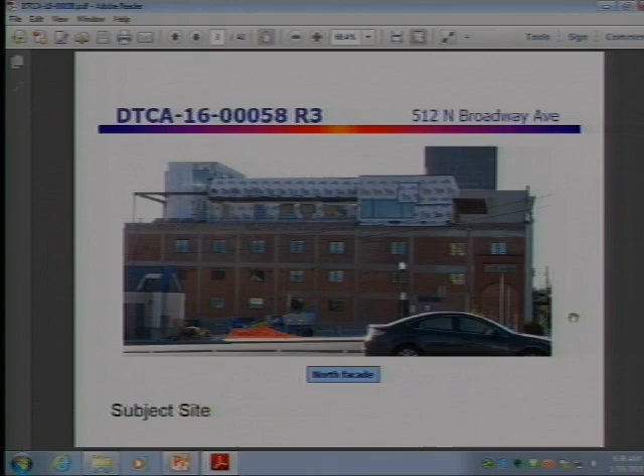Thank you. As I said, Sam Gresham, architect, here to represent the owner. I'm going to apologize. We don't design this until after it's done. This process has been a bit fluid. I don't want to take responsibility for this, I just want to fix it.

So we've proposed some ideas to staff to remedy this, to cover it up essentially, and change elements of the exterior to comply with what they find objectionable about the improvements or changes made to the third floor. It's really just this far west end, and it really involves the penthouse.

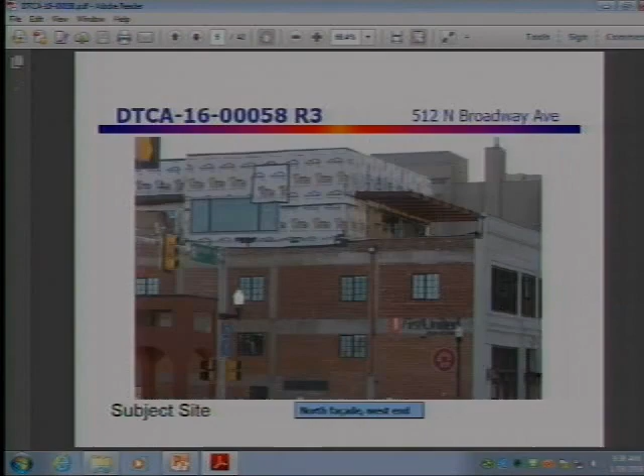Our proposal is, as I said, we've made a suggestion after staff's report on recommended item 1 of our staff report that recommends denial. We ask, though, that on item 2, where you can approve some of these items, those be approved so that we can simplify what we're asking for, and request a continuance on item 1 of the staff recommendation.

Okay, and is the intention to submit additional documentation to staff? Yes, new drawings to provide alternatives. Okay. Is that an option, to continue part of an item?

Okay, yes, staff would support continuing items 1P1, 1P2, and 1Q1. Basically, instead of denying those items, we continue them. And I guess because they're already into design, and we need it by next week, we could continue to February, because I think he's prepared to go ahead and submit possible solutions.

So that additional documentation would need to be submitted in roughly a week or so. Is that acceptable? We have it, yes.

Do we have any comments or questions from the committee? Do we have anyone else who would like to speak to this project?

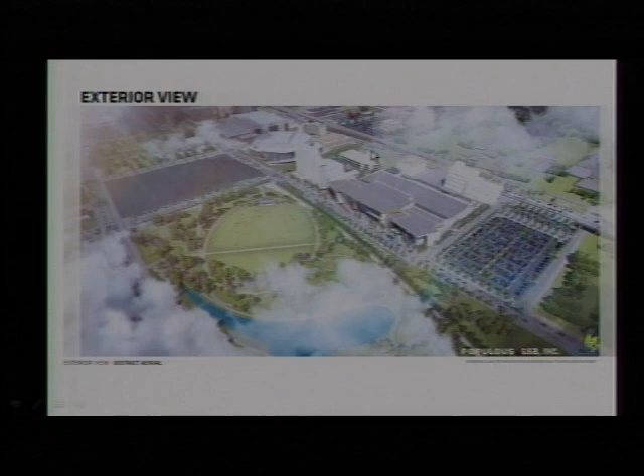Just a real quick summary - this is the convention center, park, hotel, aerial district. Again, these are placeholder locations, but you can see to the north of our building the hotel, or a version of it, and a parking structure. Those are the two items we're looking to make connections to.

Just a quick update - the building itself has not changed. The program areas are still there: the 200,000 square foot exhibit hall, the 45,000 square feet of meeting spaces, and the 30,000 square foot ballroom. All that's as is. As we showed last time, we're really just talking about an extension of level 2 along the north face of the building, and bridges that reach across 4th Street.

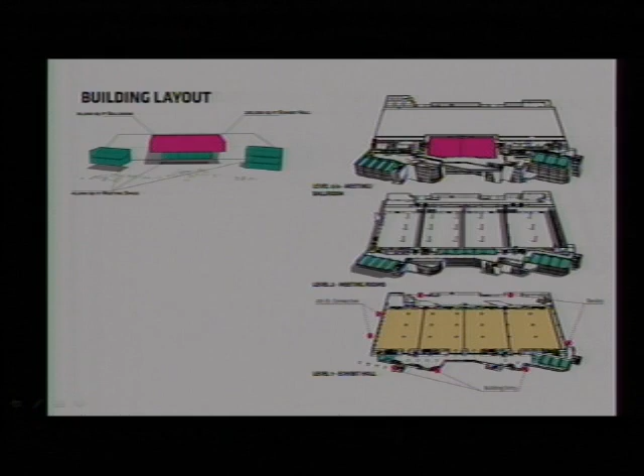Looking at these SketchUp aerials, you're seeing the convention center in the top right of each image, and the north face of the building. This pedestrian walkway would be provided at level 2, and there would be a garage connection or bridge from our building reaching over to the parking garage. That's going to be built and is being documented as part of our base scope.

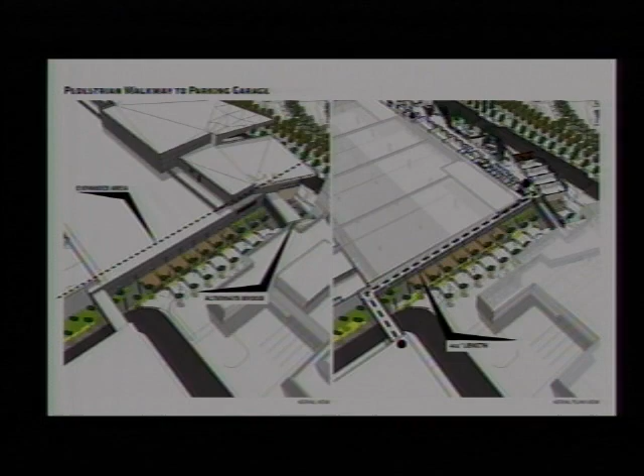The second bridge, from our level 2 across to the hotel, we're currently documenting as an add alternate, so we'll get a price on it and see if it fits our budget moving forward. Plus, knowing the hotel is behind us in scope, there's still additional design work required to make the connection as seamless as possible. But at this point, we've drawn what we know, coordinated with the hotel team some, and have something in our documentation that can get priced.

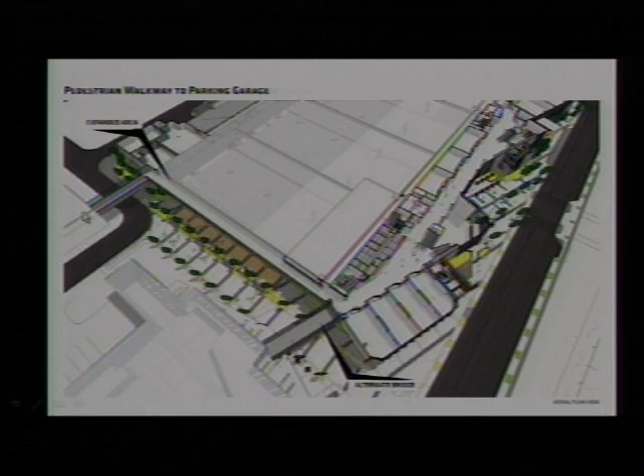Just another view - the west side of the building, or Robinson Street side, is at the bottom. You start to see this walkway and bridge access across there. What we did is extend out the current facade we had, a plaster stucco facade. We pulled that out, which created a covered walkway below along 4th Street.

We talked about that last time, as this would be kind of a pedestrian plaza area that would allow exhibit space to spill out on certain events. This provides a nice covered walkway for exterior use, whether for shade or protection on a rainy day or something.

If you're walking from the garage trying to get to the building, you could get some covered areas there. Ultimately this provides another option for customers and users of the building, those that park in the garage, a way to get into the building in enclosed and conditioned space rather than walking outside in inclement weather. But we still want to encourage people to use the streets and sidewalks at times too - it's just providing a second option.

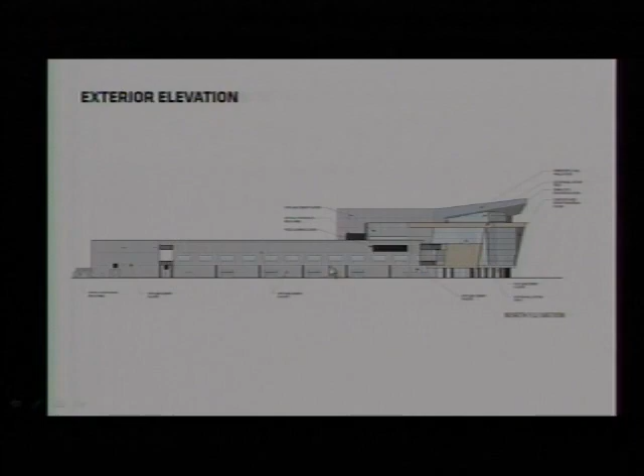This is a newer facade. The previous views were earlier in the concepts. We've added some larger windows along this to get more light into that long walkway, so the windows are bigger on this elevation than in some of those SketchUp views. Before, they were more single punched openings, and we tried to get more light and views out.

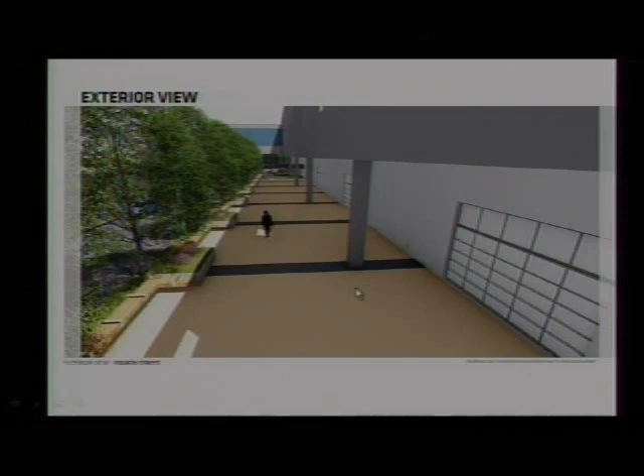We've updated the landscape under here to allow more free movement. There used to be some planters and boxes and lights around here that we had to remove when the columns came in to support the structure, to allow movement under there more freely for the covered access of this space. And just another quick view of that north facade.

And then last, here's the overall landscape design of that area. Again, nothing really a lot different. The same notions and designs are still there that we had initially shown. It's just how it had to change a little bit when this walkway was introduced.

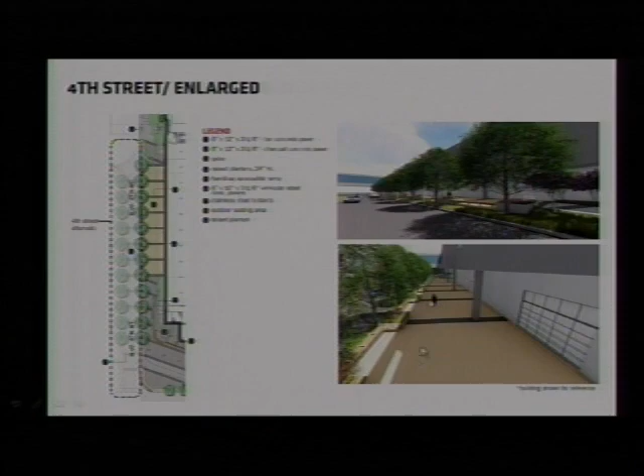Could you speak to the cladding materials for each bridge? The bridges, yes, let's go back a little bit. The pedestrian bridge to the garage, which would be this bridge up here, is an extension of the same material that is on the north facade, so it's basically curtain wall with plaster stucco on each side. And then if you go to the hotel bridge, it gets a little bit more treatment.

You can see it here. Is there another view? That bridge gets a wrap of some of the terracotta and the wood veneer that we had used on the soffits and other features where we had more enhanced materials on the western facade of the building. So that bridge carries some of that same material in and gets a little bit nicer finish than the garage bridge.

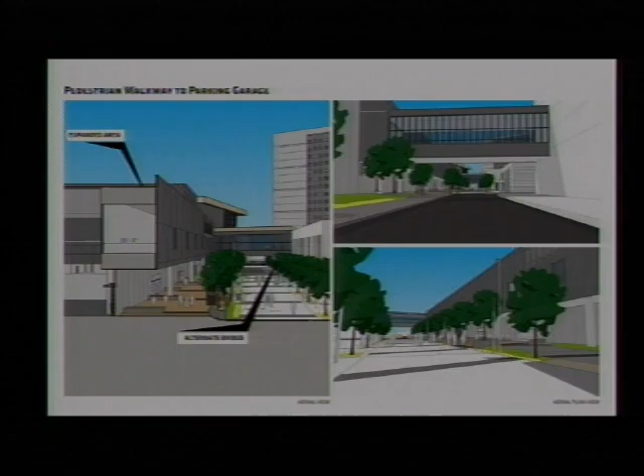And also, could you speak to the sidewalk changes that are part of this application as well? Yes, so really what that was referring to was the changes required around here for the bridge, but we did add some change to the sidewalks along 6th Street to get some additional bus queuing. This isn't a bus drop-off space for pedestrians, but it's for buses to get off of 6th Street. Prior to that, they were just parking along the curb of 6th Street. We wanted to maintain 6th Street's flow a little better, so we decided to do that, and it had to just revise the paving and some of the landscaping back there.

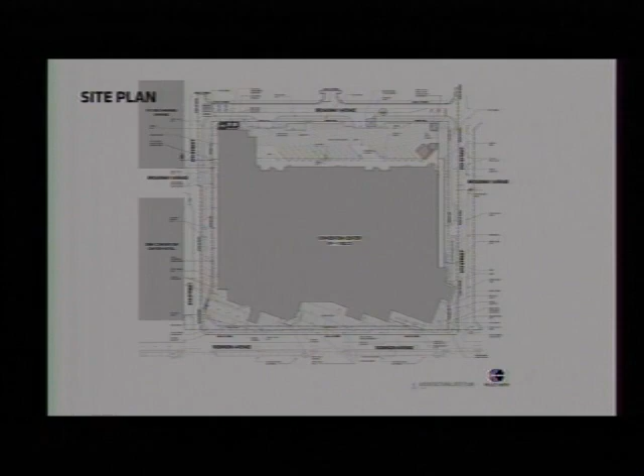Do we have any other questions or comments from the committee for the applicant? Do we have anyone here, anyone else that would like to speak to this?

Well, personally, I think the extension of the bridge on the north side of the building does enhance the sidewalk, specifically to the purpose of having exhibit space on that sidewalk spill out of the building. Providing some cover past the building facade is beneficial to that. And then almost clearing the sidewalk in front of those overhead doors allows for more flexibility in what those exhibits could potentially be.

Yes, I agree. If there's no other comments or questions, we'd be looking for a motion.

I'll make a motion to approve the item as recommended by the staff report. Second, that was Black Kriegel. All those in favor? Aye. Any opposed? Thank you, application is approved.

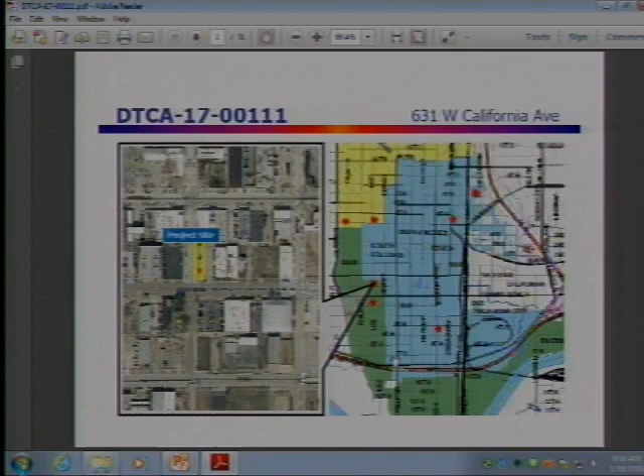And this one is proposed to go in the right-of-way. Did I get this right? Yes. Oops, sorry. It's proposed to go in the right-of-way on South Lee, just north of Southwest 2nd Street. Currently adjacent to it is a parking lot for Ozarka Water, and you can see the path here is where I-40 used to be, and it's the path of where the boulevard is going to go in, the section they haven't started working on yet.

So it's proposed to go between the sidewalk and the fence. I put a red X approximately where it's going to go. In the staff report, I indicate the sidewalk actually got replaced subsequent to the application being received. The applicant had no idea that it got replaced, and so the topography has changed, and it's pretty steep. The sidewalk might actually even be a little wider.

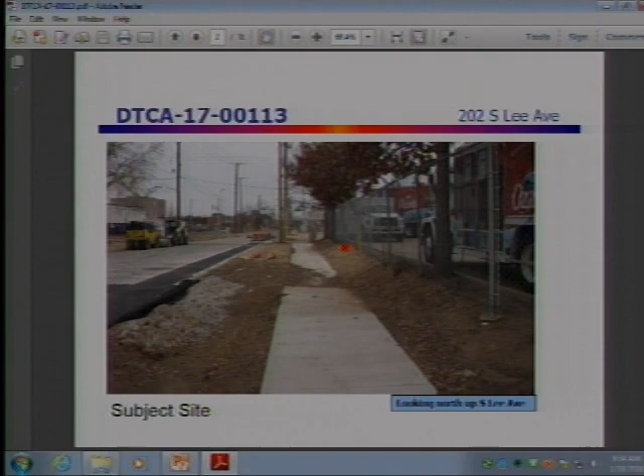But staff is concerned about this location from the standpoint that at some point in the future, if we anticipate that this site is developed, buildings coming out all the way to the street could be impacted if there's a 35-foot tall pole either on the property line or within a foot of it. It could impact the design, the location of doors and windows, that type of thing.

We contacted the Public Works Department because we're also concerned about the location of where the boulevard's going to go in this area. There's a significant amount of work planned here. Apparently Second Street's going to be closed. The entrance to the parking lot is currently on Second Street, and they're looking to relocate that access to Lee, which potentially could be right where the pole's proposed.

So in the staff report, we recommend several things. One, we feel the best location for something like this would be in the back of a property, on the alley, next to a building, on top of a building, and not in the amenity zone where you want to see things that are amenities to pedestrians, such as benches, trash cans, or landscaping. This area is going to change, especially when the boulevard goes in. So staff recommends that this item be continued to allow them to look for moving this location and not having it out in the right-of-way.

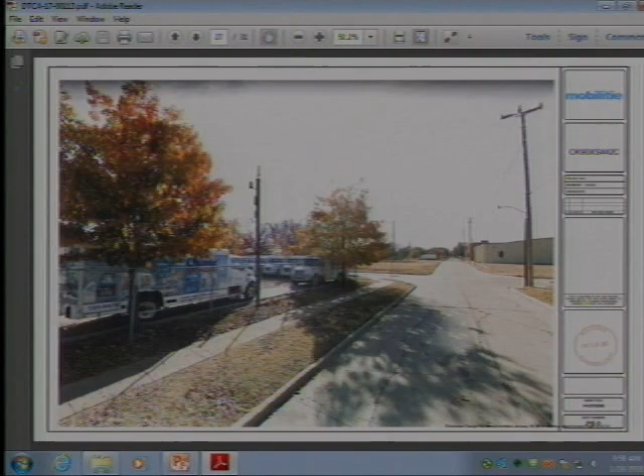Just one thing, sorry I didn't have this up earlier. In the staff report, the proposed pole is 35 feet from the ground up to the top of the antenna. If you look at that, the fence is 6 feet tall. So one of the things staff also included in our recommendation is that proportionally that pole doesn't appear to be photoshopped in at 35 feet—it's going to be taller than that if the fence is actually 6 feet tall. So we were recommending that, in addition to all the other items I mentioned, this get revised so it's more accurate with what it's going to look like, whatever location they choose.

I measured the fence yesterday—it's in the packet. It's 6 foot 8.5 inches tall, and the pole itself does need to add another 15 feet proportionally, but it won't be any taller than the utility pole across the street.

Is there anything that precludes the pole's location from being moved north or south along the property? In the packet there's some information about how this technology works—it's different from the regular cell towers we see, those blade-looking devices.

If you turn in the packet to the information on increased usage, you'll find a page that looks like this, a breakdown of the equipment. This cell pole equipment is very advanced in a way that it cannot perform if it gains interference from being next to a regular traditional cell pole. It has to be away from overhead power lines, has to have an umbrella of area, has to have open sky above it. The antenna itself is 3 feet tall, 4.5 inches round, and again, interference from other power lines and other traditional cell tower antennas interferes with this signal.

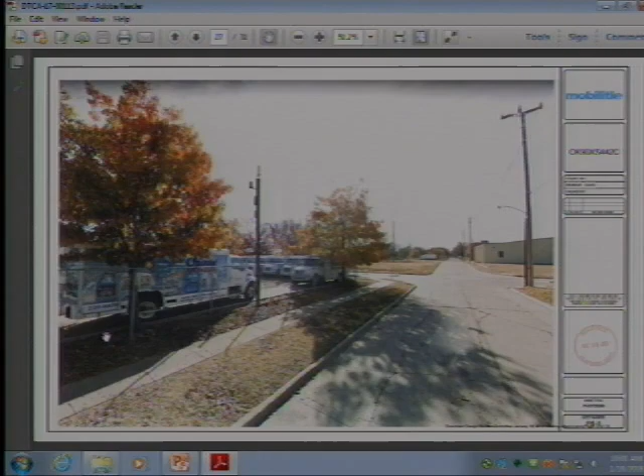So I see there's existing lines on the west side of the road. My question still holds: is there anything precluding moving this pole north or south along that side of the property? On the west side? I'm sorry, the west side. Based on this photo, there are electrical lines on the west side of the street. Right. So my question still holds, is there anything precluding shifting this pole north or south of its current location along that property? There wouldn't be anything, but on the north end of the property there are power lines that start up and go down the alley, so it would have to jump over that alley and into the next lot.

But the other reason we accepted this site is that the property owner is in agreement. On the last page, you'll see they have an agreement with no objection to us installing here. We're not obligated to seek the property owner's permission, but we always try to communicate with them, and he was agreeable to the installation on the adjacent property. I found a picture describing what he was saying: when you go north of this location on the east side, when you get to the alley, that's where the poles start up. They actually have poles on the east side of Lee Avenue, north of here. Okay, that helps.

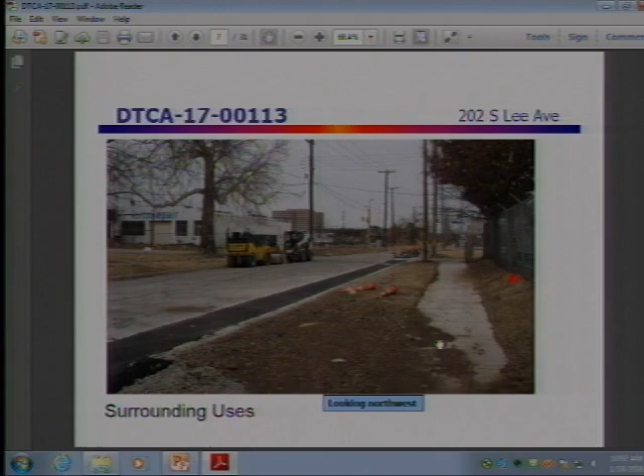Do we have any other comments or questions from the committee for the applicant? Yeah, why can't you go on top of a building? Again, on top of buildings or private properties, the internet providers do not want to be on private properties, because the uniformity of working with the cities and the ability to work in the right-of-way as part of the utility licensing through the state of Oklahoma allows us to do that. But you also cannot control if a private property owner wants to put an antenna on top of their building, which would take down the availability for our antenna to work properly. So putting the pole in the right-of-way is the best solution to make sure we have open air and are able to pick the spot that is best for the signal.

None of these poles are by speculation. It's not a situation of 'if you build it, they will come.' The need is already there, so that's why these areas have been selected. It's not by randomness or future build-out — it's what is needed there right now.

Donald Smock, 608 Mary Lee Lane, Edmond, Oklahoma, here on behalf of the applicant. On this particular site, we did try to contact the property owners numerous times. Phone calls stopped in, but they were not available. Again, we're not compelled to do that, but we do want to always bring the adjacent property owners into this situation.

In this packet on the handout, there are other options for this location that might make sense with the pole configuration. The addition of the light arm would be something that would work in this neighborhood area, would be a nice amenity. Our engineers wouldn't be opposed to seeing if there's any interference from the substation across the street.

There's no direct overhead lines, which is a plus, but being a substation, it does generate a lot of interference. However, our engineers would be more than happy to look at that, and we're well prepared to move forward with a continuance on this.

Looking at the options in this packet, you see a breakdown and description of all the equipment on the pole, and the pole options that are more suitable for an area like this. You see real-time applications in Los Angeles, New York City, and various other locations. The Kansas City, Missouri build-out would be something that might work in this downtown area.

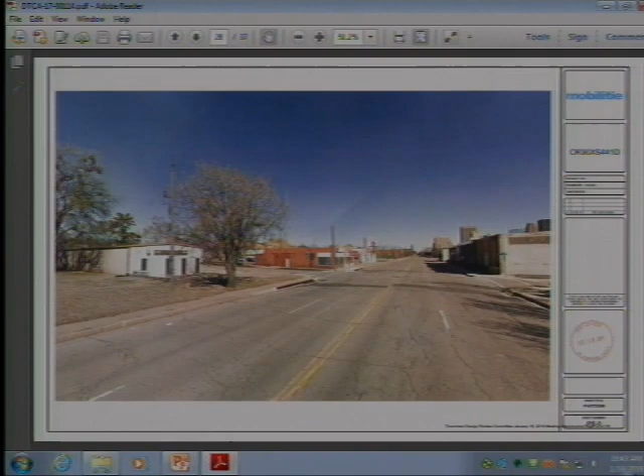Keeping that in mind, we would be happy to agree with a postponement, if that's the view of the committee, to see if we can find a location, perhaps across the street, if the engineers agree there's no interference with the signal. I know there's a water line that runs down 4th Street - I believe we'd be clear of that. We have to be at least 10 feet off the water line. So that is something we would be agreeable to continue.

I think it would be good to coordinate with the property owner and look at locations that work for everybody on the street. But this also makes me think the solution could be used in other locations as well - as we put this new technology in place around the city, we could slowly take down existing light poles and replace them with this. I'm not sure if that's an option, but as we continue it, maybe we can look at that as an overall strategy for the city.

Jumping back to Lee Avenue, there was a dusk-to-dawn light on the utility pole at the corner of 2nd and Lee. That's why we didn't propose a light there, to be redundant. But if it's something the committee would want to move forward with, that's something we would look at as well - it's not a problem.

If you agree to a continuance, and that's the way this goes, I see in this packet, the second packet, a lot of successful installations where the pole is near the curb and is part of a light system that's repetitive down the street. So I think it's successful whenever there's a series of poles, and one of them has a very small percentage of its overall height dedicated to that last little bit - but it's dual use.

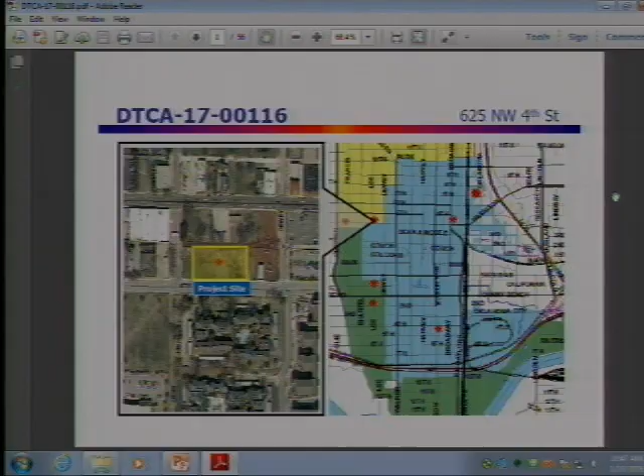Item 6G is case number DTCA 17-00116 at 625 Northwest 4th Street. Is the applicant present? Yes. I'm Dan Govine of 1828 Northwest 18th Street, Oklahoma City, with Allford Hall Monaghan Morris, the architect, joined by Richard McKown, the developer. We have a presentation, I wonder if you have that file—if I might be able to click through that as I go, it'll move quicker, I promise.

I have that on a thumb drive. Sure, great, thank you. Perfect. Okay, oops. There we go, perfect, thank you.

We've worked on about 6 projects together with Richard, so this isn't the first time we've been here. The key difference with this proposal is that it's a for-sale product, as opposed to some of the rental typologies we've previously worked on in Deep Deuce with Level and Mosaic. This is a different, higher-end unit that we're proposing here.

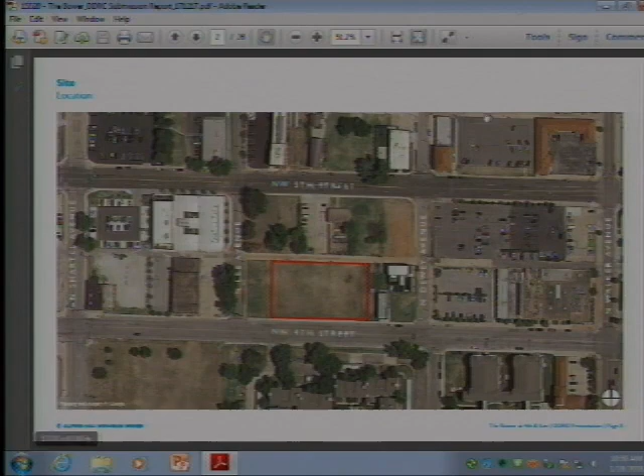We're seeing a lot of new residential development in this area, and we're very happy about that. We view this increasing density as very positive for Oklahoma City, and it's the primary focus of our firm's work here—mixed uses, mixed densities, all key to a vital downtown, as are property owners vested in their community. It's hard to believe from these photos that we're only 3 blocks north of the Civic Center, but that's where we are.

With John Rex School only a few more blocks away, we see these units appealing to young, growing families, as well as empty nesters and young professionals alike—basically people who want to take advantage of all the culture, opportunities, and entertainment that downtown has to offer.

So we start with a set of ambitions that guide our decision-making and design process. Number one is placemaking. As urbanists, we're focused on designing a piece of the city—considering the anticipated user and the specifics of the site and location, which inform the design to create a contextual, specific proposal for this site in Oklahoma City.

Number two is the mix. We've spent considerable time getting this right. We know density is important, but we also understand where we are, so parking can't be ignored. With that, we worked hard to create a hybrid proposal combining a townhome typology with a condominium typology on the same site, which frees up some ground area for necessary parking.

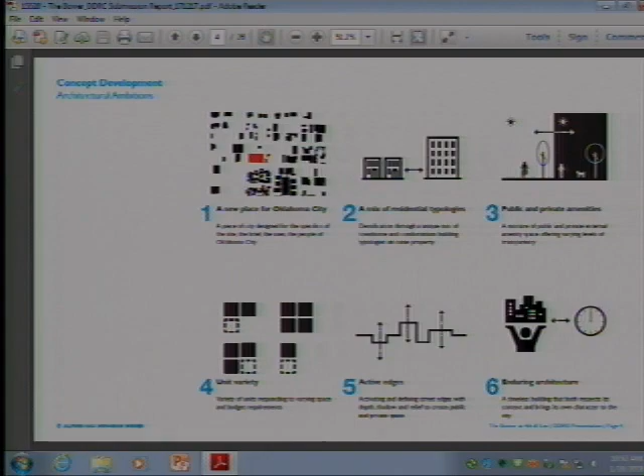Number four is unit variety, which sounds simple, but really this is one of the most difficult yet most important components to achieve on this site. Considering the cost of construction, having highly customized units is always a delicate balance. But the bottom line is people have different budget needs, different spatial needs, and we feel the design responds to that.

Number five, active edges. This is relating to public amenities, but particularly the streetscape design. We're using depth, using shadow, pushing and pulling the facade to create relief, to help define the street edge where public and private space meet.

Last but not least, enduring architecture. So once we've got our strategies right for the last five items, we're thinking about what the building looks like. We intend to create a timeless building, respectful of its context, but with a unique character that helps define this particular piece of the city along 4th Street.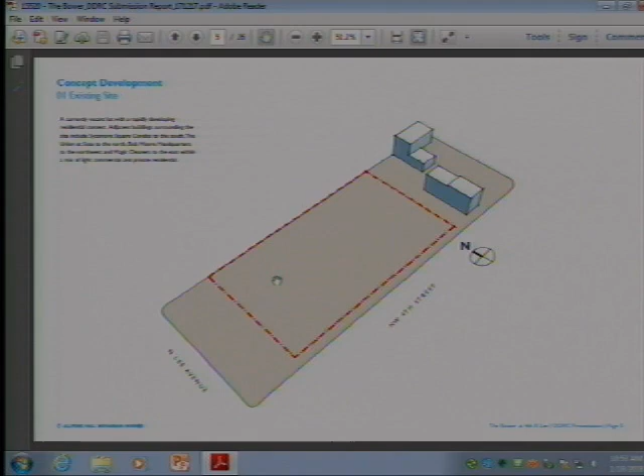So what does it look like? We start with the site. It's a vacant site at present, just grass. We define the street edge with a 2-story block of townhomes along 4th Street. The block is then broken into two masses, which defines the main entrance for the condo block behind. We've located the mass of the building to the north. Parking is located at ground level. The entry sequence terminates with a small lobby and elevator, mail facilities in that portion of the site.

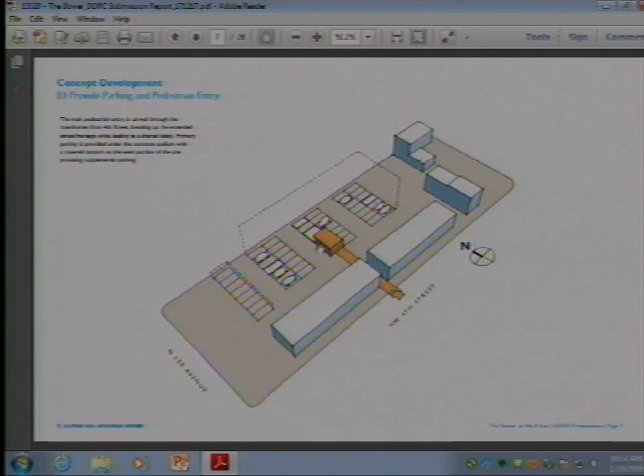We then introduce density with the condo building above the covered parking. That consists of 3 floors of 8 units per floor, which includes 2 penthouse units, and you can see that popped-up area. Those are 2-story units with an internal communicating stair.

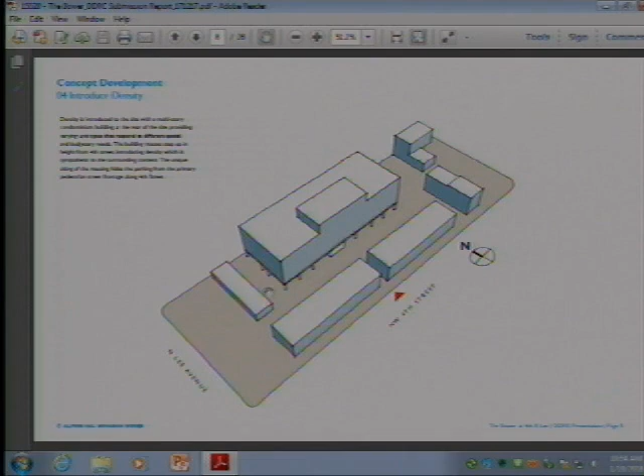Additionally, there is an 8-car carport on the western edge of the site, which will be constructed of brick. It will have a corrugated metal roof, which is flat and not really visible from the surrounding areas.

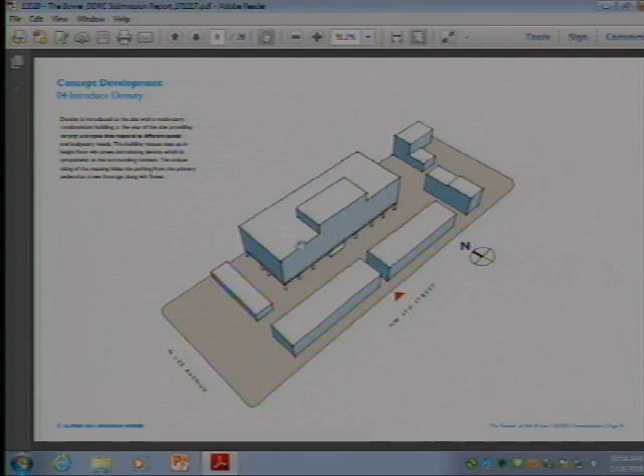In terms of massing, the height is concentrated towards the rear of the site, maximizing views to downtown. The buildings then step down along 4th Street, offering a more pedestrian-scaled environment. There will be dedicated entrances for all the townhomes on 4th Street.

So again, this facade is modulated. We've pushed and pulled, we've inserted balconies to add architectural interest, which also offers protection from the sun and the wind. This allows us to control light and frame views towards downtown.

Finally, we overlay landscaping. Street trees improve the pedestrian experience, and also help shade the south elevation. Landscaping against the building further provides public amenity, but also helps buffer the public and private space within. Behind the townhomes, there are private fenced yards, so that's the owned space. Behind that, we have a shared landscape zone with trees that will help buffer the condo building from the townhomes on the site.

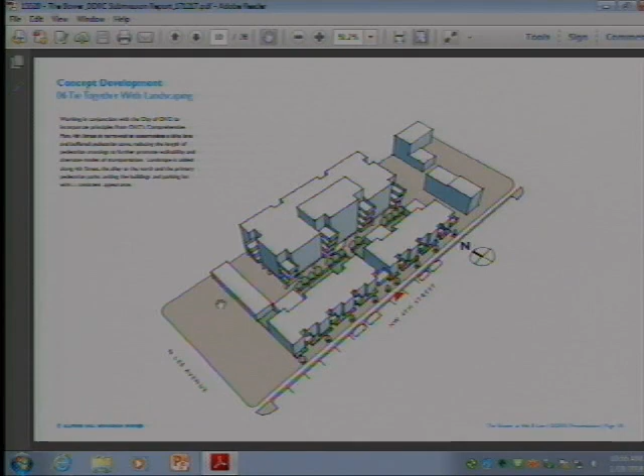Moving forward, our materials palette is fairly simple. The buildings are brick, basically, so we've chosen a high-quality king-size brick. It has a lot of iron content, so it has lots of the earthy reds and browns native to Oklahoma. We're really excited about this.

The condo building will sit above a concrete podium, which will be a natural finished architectural concrete, primarily screened on all sides. It will be visible from the alley frontage.

We also have welded wire mesh, again talking to the concrete podium, which I'll show more on in just a moment. This will serve as a trellis for vines to climb in between the columns of the parking structure, which will help screen the parking further and provide a nicer edge to the alley side.

Our balconies are custom steel fabricated with a deeper flat picket, so that allows views out from the units, but helps screen the units from the oblique street angle view that most people experience, like in cars or walking down the street.

Black vinyl windows, low E glass. There will be some fences within the site that won't really be visible from the public side of the building, and those would be made out of wood, stained.

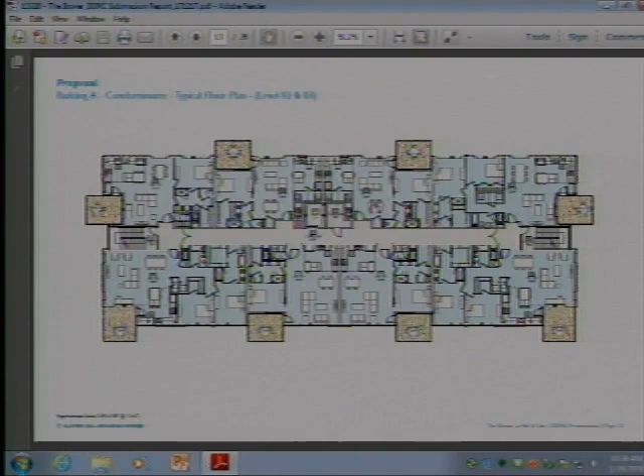Zooming in on what a typical unit looks like—again, large windows, lots of windows, very large balconies, which we see as external rooms extending the living space outside, island kitchens, dining areas, and a large master suite with ample closets. That's a 1,500 square foot unit.

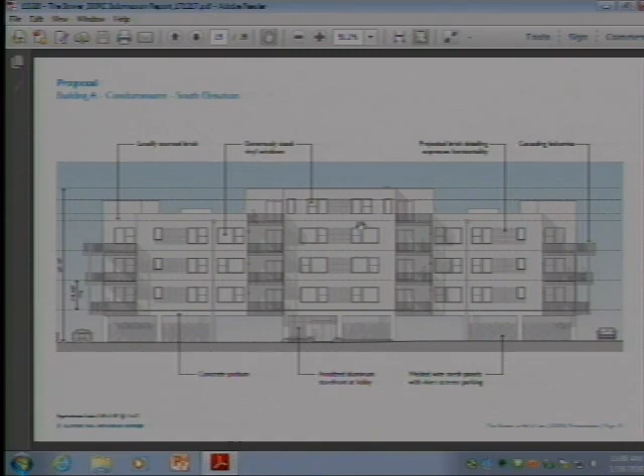I'll flip through the elevations briefly. You can see the stepped form where we have the 2 penthouse units, where we've broken up the mass into smaller chunks. We express the verticality with these carved cuts where the balconies live, then balance that with a horizontal expression of our brick. By using these projecting bricks, we get a nice play of shadow and light on the building, which changes throughout the day. The north elevation is similar.

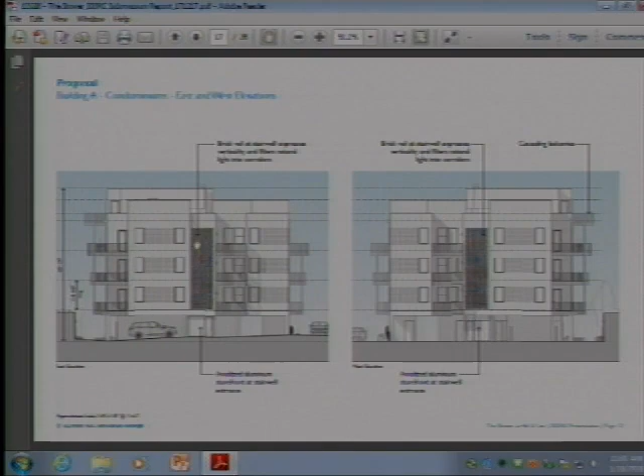This would be the alley frontage, so you get an idea of the infill and the climbing vines, which screen the parking, as well as our gates and overhead door containing the trash room. On the east and west elevation, we have an 11-foot 8-inch floor-to-floor height, which results in a 10-foot clear ceiling height for all of the units. Our overall height is 60 feet, taking into consideration a couple feet of fall on the site, and that's within the code-mandated height limits for our construction type and site. We've expressed the stairs on the exterior with a brick screen wall, which allows light and views out but also shades the lower east and west sun angles for the site.

Moving to the section, one element I wanted to point out is this idea of the cascading balconies, which provides a greater area and sense of this being an external room, increasing in value as you go up the building.

You get an idea of how these units stack up: ground level parking, 2 floors of standard 10-foot clear flats, and then the penthouse units with their communicating stair and the pop-ups adding north light and volume to the units as well.

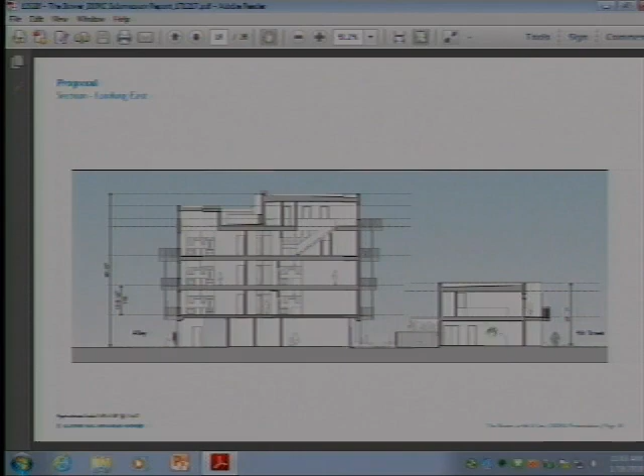The townhomes are 2 stories. They have a balcony which projects 3 feet over the 4th Street sidewalk, and enclosed fenced backyards.

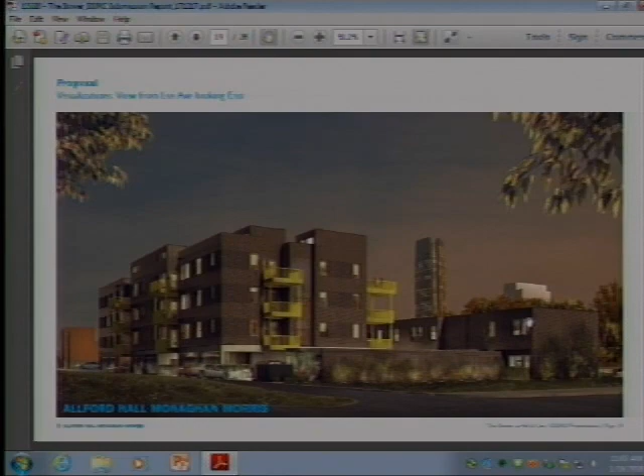Finally, CGI of the main condo building, roughly from the alley and Lee Avenue. You can see these ideas: the cascading balconies, brick detailing, expressed stair, screened parking along the alley, the carport with its brick facade, and the townhomes beyond, which I'll quickly go through.

These are unique and quite different to the condo flats. This is where the larger homes are located, primarily 3-bed units with some 4 and 2-bed units as well, geared more towards families. They have private enclosed garages, as well as larger covered patios and backyards.

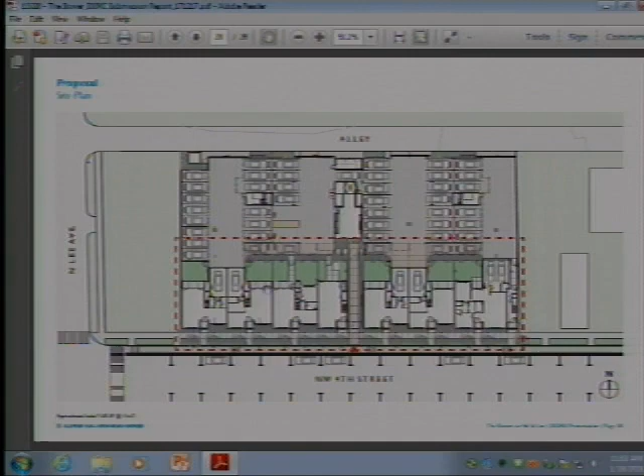In the enlarged floor plan, you get an idea of how this street edge works, with the elevated stoops at the entrances, and overhanging balconies providing cover for those.

Inside, this is our 2nd floor, with south-facing balconies which allow us to frame those views towards downtown a little better. All of these have north and south exposures, so ample natural light.

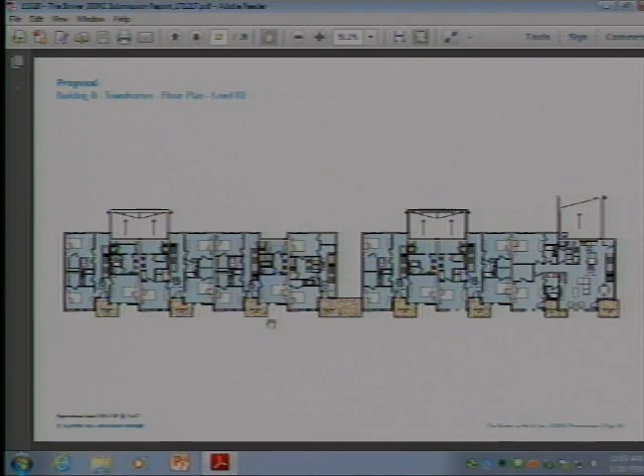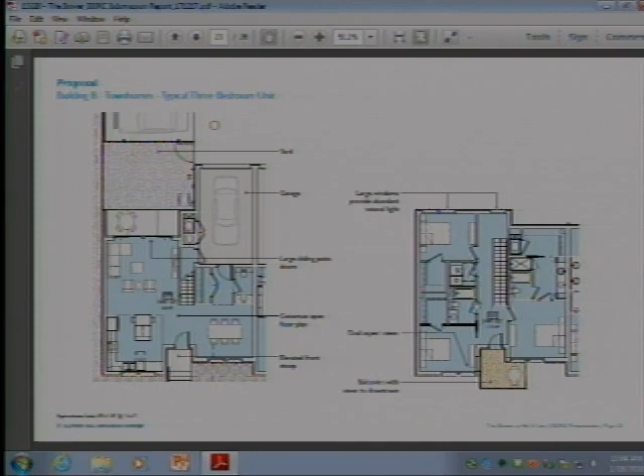Inside, typical, similar open plan living. The townhomes have added amenities such as more storage, dining rooms spilling out into covered patios, and upstairs a large master suite. Laundry facilities are upstairs in these units.

In elevation, we have a 25-foot height, which establishes a more human-scale datum along 4th Street. In the back, you can see the solid garage doors which align with our parking drive aisles. All of the units have large sliding glass doors, which extend that living space into the backyard.

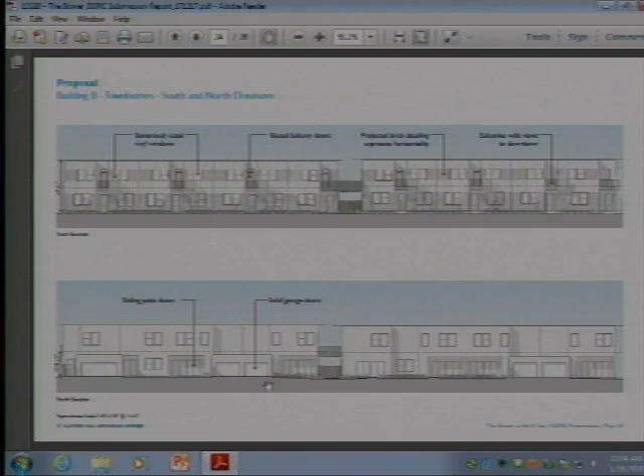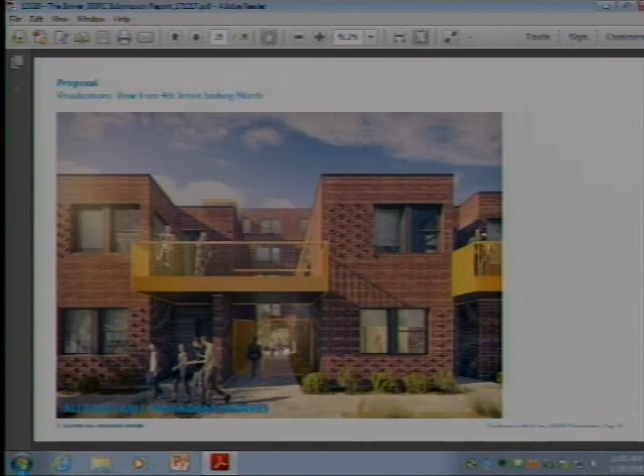Finally, a view down 4th Street where this idea of the integrated streetscape is apparent: the parallel parking, bike lane, buffered pedestrian zone, street trees, and stoops are visible.

The idea of breaking down this facade into more human-scaled units becomes more apparent. Again, that idea about the balcony pickets screening those units from the street view is evident.

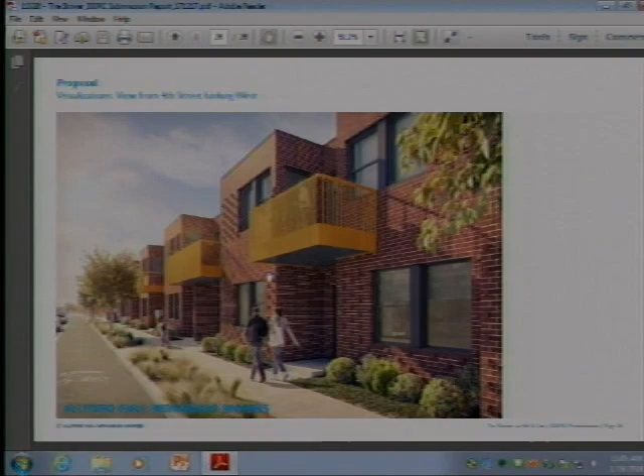So all said, 32 homes on the site, 54,000 square feet. It's a 140 by 250-foot site, and that's a lot to pack into that amount of area. We're very excited about it, and I'll stop talking for a moment and open it up to any questions if there are any. Thank you very much.

Does staff have any comment, or are there any comments from the committee?

When are they going to be done? Can I sign my lease now?

We hope that they're done in the second quarter of '19.

And I will note that the plat was approved, right? But were there any conditions or anything changed about it? The plat was approved. I don't believe there were any conditions. That's correct.

Do we have any comments from anyone in the audience on this item? Sure.

So it's a lot easier to incorporate the new street plan, but I think there's a lot of interest in incorporating that new street plan with the sidewalks and the bike lane that's interior, so hopefully we see more of that going forward. But just want to sing their praises on a job well done. Look forward to seeing it.

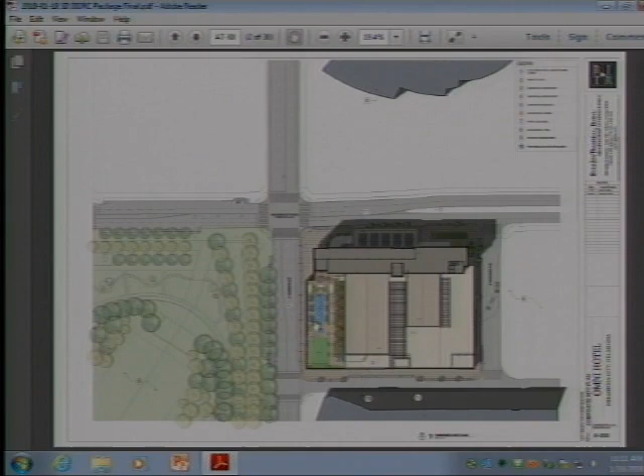As you can see from the overall site plan, the tower of the hotel, which has all the guest rooms, is located in the northern part of the block. The remainder of the block is the hotel program with all the amenities and back-of-house support functions that a hotel of 605 guest rooms would need, plus all the outdoor space associated with that on top of the roof.

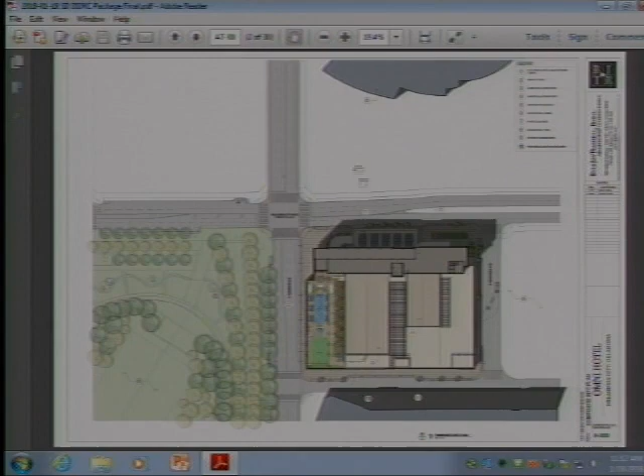Going through the ground plane around the entire block, we can walk from the corner of Robinson and Oklahoma City Boulevard, directly across from the arena, where there would certainly be pedestrian traffic, which we would enhance to create a great experience moving from the arena south to the convention center by activating the entire streetscape with active uses—starting with an entertainment bar concept at the corner, moving into a full-service restaurant, and then a cafe or coffee shop. There's a lot of indoor-outdoor covered seating utilizing the sidewalk, inviting people to move in and out of the project along the entire length of the block.

Going to the right along Oklahoma City Boulevard, this is the main front door of the hotel. Obviously, with a hotel of this size, having an arrival that accommodates motor vehicles in a covered porte-cochere type environment is important. The way Oklahoma City Boulevard is being designed compared to Robinson, or Broadway and 4th, makes it the logical front door for the project, and that's where the motor court arrives.

There is a notion for a potential underground valet parking area, accessed by a quick ramp that you wouldn't see or experience from the sidewalk. It just ducks right down, disguised by a combination of landscape and hardscape elements, where valet could pull up and service it like a normal hotel of this size would accommodate.

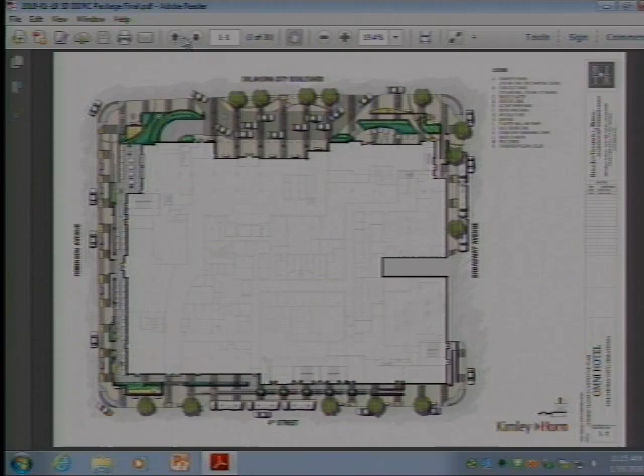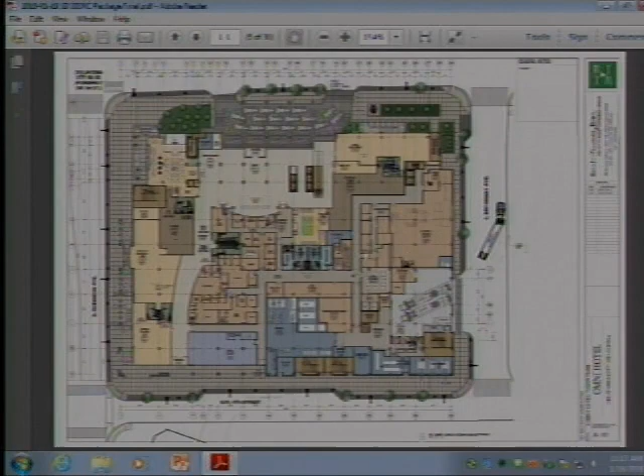That would transform there. And of course, we can certainly use a little bit more program for this size hotel by taking out the ramp that would go down to the deck there. So that would be the only change for that.

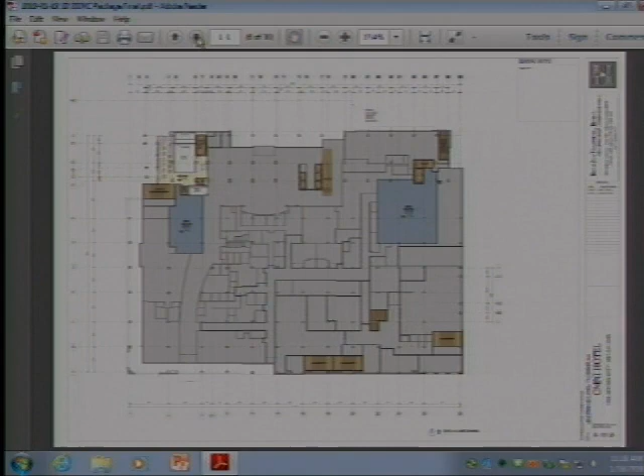Then the second floor is the main meeting and conference space. There's a grand ballroom you can see here, and a junior ballroom here. The light colored spaces are all the circulation required, which we call pre-function outside of those spaces that wrap around, coming from the elevators and some escalators from below.

You can move one direction to the grand ballroom and ancillary meeting rooms, as well as a significant element we think is great, which I'll show you three-dimensionally - a covered outdoor pre-function that supplements the indoor pre-function space. This would be located directly across from the park with fantastic views, providing three-dimensional depth so that when you're on the street or in the park or walking by, you can see activity not just on that ground level, but even above that, with inside-outside activity happening there.

So it's not just a blank wall of convention stuff happening behind. It really opens itself up to the park and the street on that side.

Everything else you can see here in similar colorations are other meeting rooms, and then the back of house space with kitchen components and everything that serves all those components.

Another interesting feature is that on this pre-function space, we have daylight at both ends. So when you're in this space, you're oriented to the convention center to the south, as well as framing a view to the downtown skyline to the north.

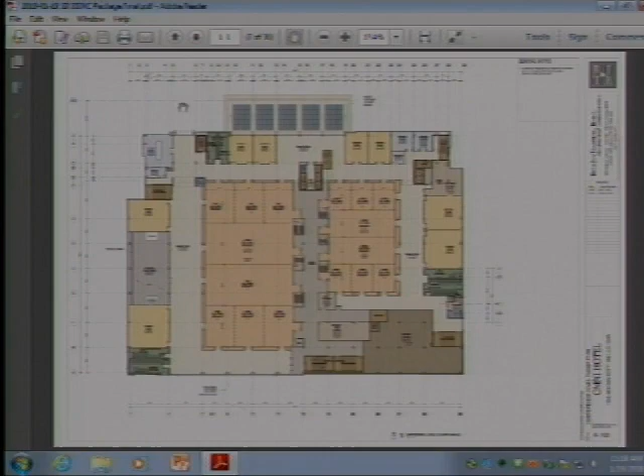Then we get above that with a roof that you can see the roof of the ballrooms here. Significantly, it's important that we located the tower so that it's not over the ballrooms in any way, because the structure of a tower interferes with the planning of those ballrooms, which are column-free space.

But when you arrive at this floor from the elevators here, we have a spa on one side. We have a fitness center there, and then you can continue to an outdoor bar that's covered by the tower. Once again, it's another layer of this interaction between the low levels of the building and the park and the street at that significant corner.

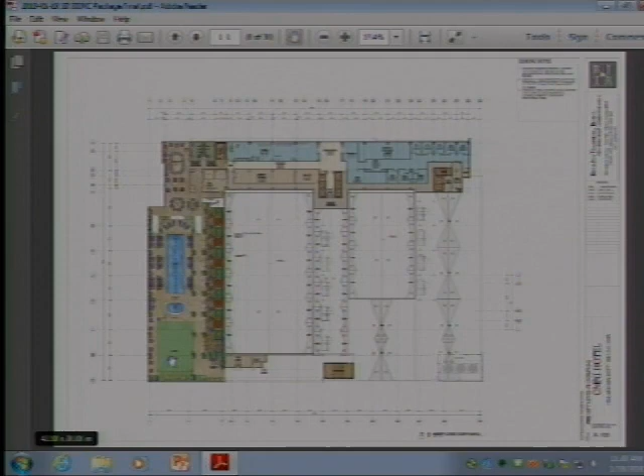That then goes completely outside to a rooftop environment for the amenity pool, complete with fire pits and resort-style cabanas, and an outdoor function space that could have pavilions and tents set up there. So when you're driving by or walking by, you'll see lots of activity, lots of light and people and great things happening up there.

And then finally, as far as the stacking goes, these are typical guest room tower plans, low-rise and high-rise, and then the top floor plan that you can see how the guest rooms lay out, with downtown views to the north and southern views to the south.

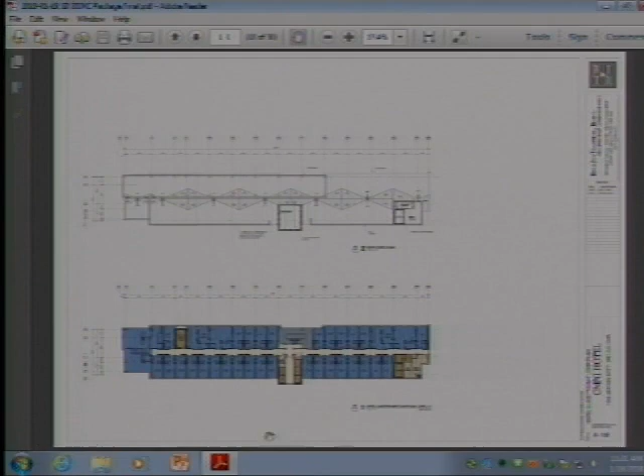But then, of course, as you're looking at your room, looking up north, you see the core-to-shore plan in this layout. All the units look up the core-to-shore, primarily to the core, and then primarily south to the shore. But everybody enjoys that sort of experience from the guest room tower.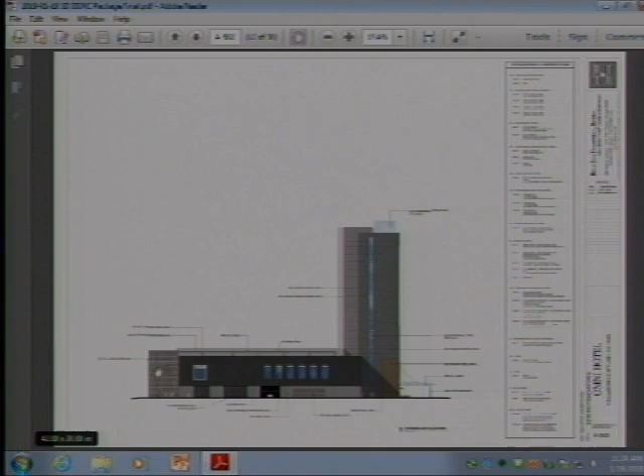There are also some metal louvers we're using for the mechanical requirements needed at this corner of the building, at 4th and Broadway.

From that point, it turns the corner. We still have the stucco-like EIFS-type finish, which then, as we get closer to Robinson, translates back to the brick material that frames out the secondary entry. That's where active space sits beside it, with retail and coffee shop space at ground level, and open windows that look into the pre-function for the grand ballroom above. There are also signage and super graphic opportunities at the corner at this location.

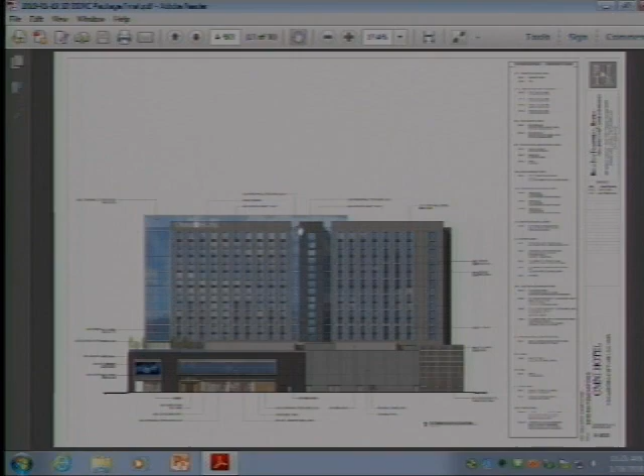The tower you see there is the tower beyond. It has the architectural expression for the elevator core that needs to be there in lieu of some of the glazier look seen on the north sides, but otherwise it's a very similar facade to the north side of the tower.

Coming around to Robinson and completing the elevations, you can see the corner where the super graphics are at the second floor, over the cafe, coffee shop, restaurants, and their entries, with outdoor seating all along Robinson. Then there's the entertainment bar, with the lobby and the pool bar above in the notch of the building, opening up into the open terrace. So you have three levels of active space, from the ground level up to the open pre-function off the ballroom, and then the rooftop terrace where the pool is.

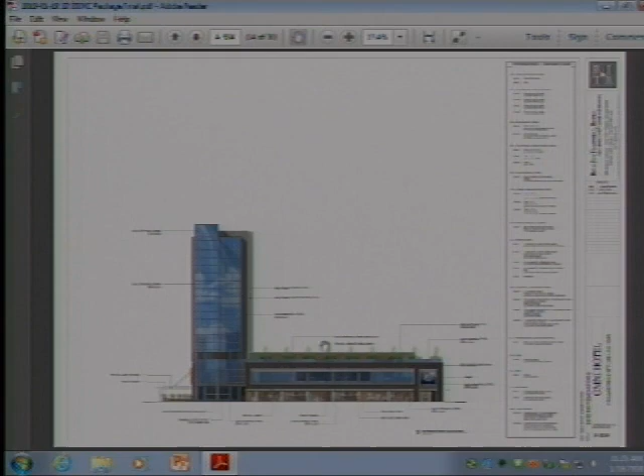To give this a bit of a three-dimensional reality with the modeling, you can see the view from across the way at Robinson, moving from left to right and looking down Oklahoma City Boulevard.

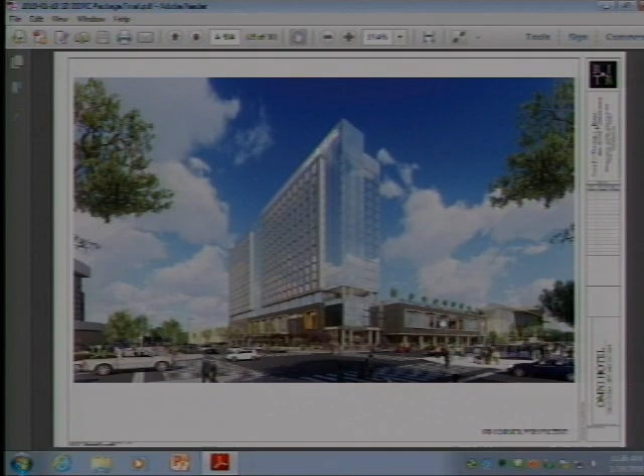You can see the tower with this combination of glasses that soars to the sky. You can see the picture window here, the porte cochere motor court happening here, the entertainment bar happening here with the lobby bar above it that opens up into the rooftop terrace, the ballroom level, and all the activity that happens on the ground level along Robinson.

This moves around to the south. You can see a little bit better views of the stacking of the three levels of active space all along the block.

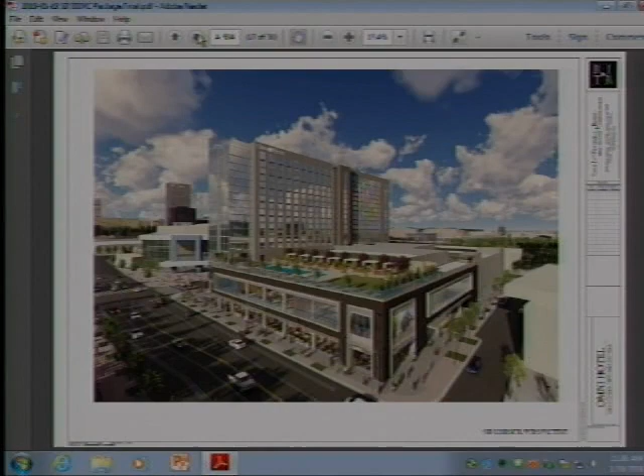Moving around even further to the south, a little bit closer to the convention center, you can see a different view of that and how it all relates from the arena to the convention center.

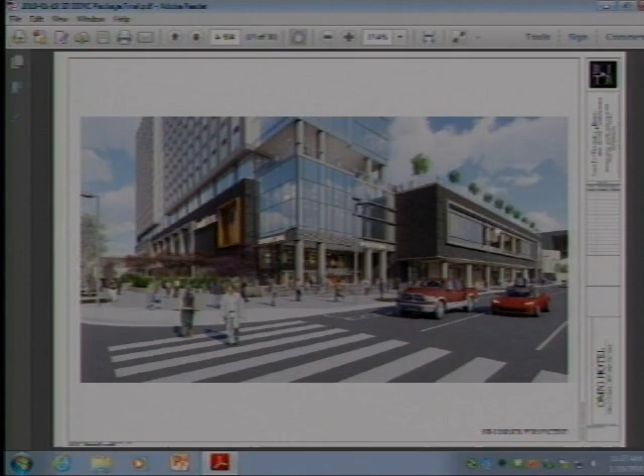Moving back to Oklahoma City Boulevard, a straight-on shot, not unlike the elevation, but a little bit more three-dimensional, closer to the flavor of the activity we anticipate at the corner with the mezzanine bar and the entertainment bar, with the lobby bar above. There will be meeting rooms in between on the meeting room level, but it's a very active corner.

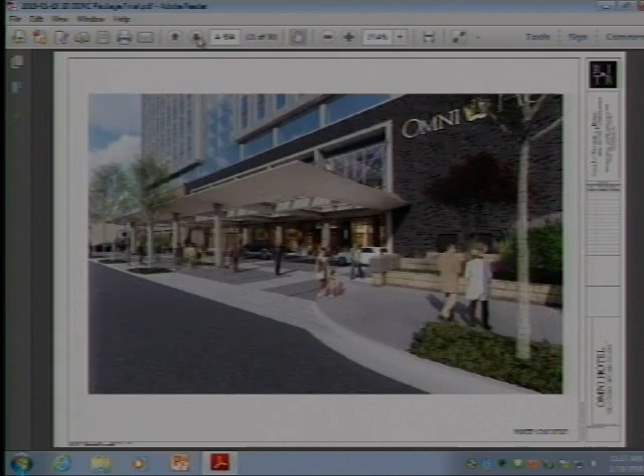Same thing with the opposite corner as it wraps around and becomes the secondary entry. The motor court itself is typical of a hotel of this size, but we've designed it so it's very walkable, very safe. It's not off-putting, it's very permeable. People can walk in and out throughout it, so it's a very open environment.

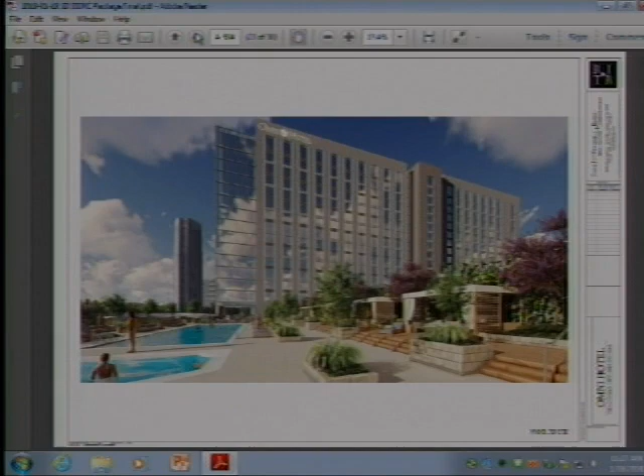And then, of course, a view of the pool terrace on top, which we hope to be a great destination for Oklahoma Cityans. We brought some additional diagrams if there are any questions about floor-to-ceiling heights or floor-to-floors and that kind of stuff. But that's pretty much what I brought today. If you have any questions, I'd be happy to entertain any.

Thank you. I think this is great. Do we have any comments, questions for the applicant?

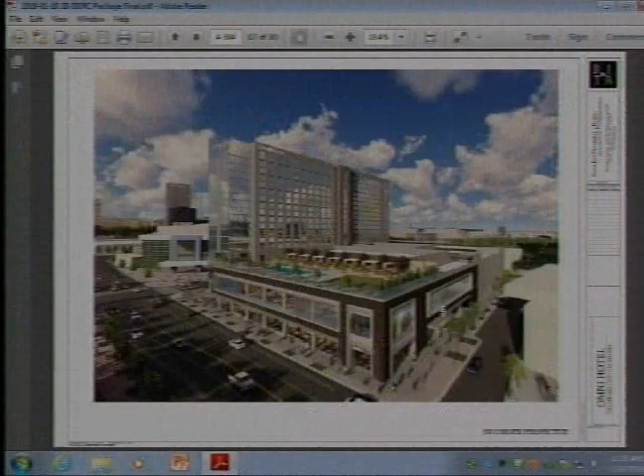I've got a question. Earlier this meeting, we looked at a potential pedestrian sky bridge from the convention center to the hotel. Do you have a sense of where that would tie into the hotel itself? Right there, very close to where the actual secondary entry is, facing 4th Street. We would anticipate that bridge could tie in right there and be a great addition to that environment.

We talked about a bridge from the hotel to the convention center and the garage to the convention center. Is there any anticipation for a bridge from the hotel to the garage? Not currently planned, but that's not precluded by the way the hotel is planned right now. Okay.

Do we have any comments? Would anyone in the gallery like to speak to this?

Rob, when were you guys thinking you would come in for approval? A couple months? Do you know what the date is? Just roughly speaking, the March meeting? We just wanted to give you guys a look and see what any initial comments you might have. I think this is a great project.

There's definitely a lot of people here in Oklahoma City looking forward to this project. I think the streetscape was handled extremely well, especially on Robinson. Like you said, providing a presence of the building close to the sidewalk, giving it an urban-type setting, but at the same time allowing flow and activity to permeate into the building at all three levels, I think is a great move.